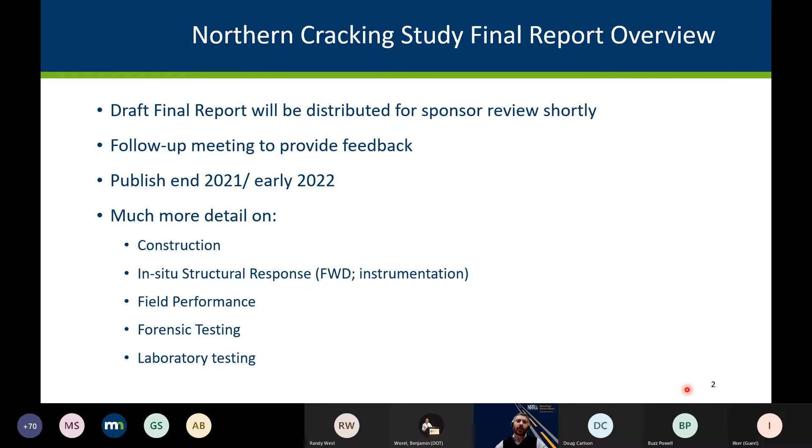One of my challenges in putting together this presentation, especially as Carolina Rodezno and I have been working on this report, is trying to take a large project we've done for 5 years and break it down into a 25-minute presentation. We could probably talk about this project alone for at least a day. So if there's something you're particularly curious about, please see the report for more information on construction, FWD, instrumentation, details on field performance, and laboratory testing.

In the limited time we have today, I'll provide background on why we did this experiment, what sections we were looking at, what happened at MnROAD, and then lab correlations, conclusions, and takeaways. The cracking group experiment was initially started with MnROAD and NCAT, and the overall objective was to correlate the whole suite of laboratory cracking tests to field performance. We did that with test sections at NCAT and MnROAD. The NCAT sections focused on top-down cracking, and the MnROAD sections focused on low-temperature cracking.

The MnROAD sections are a little bit different than the NCAT sections. MnROAD is live interstate traffic on our test sections, so we construct our pavement test sections a full interstate width. We have 2 travel lanes, 12 feet wide, and a full paved shoulder.

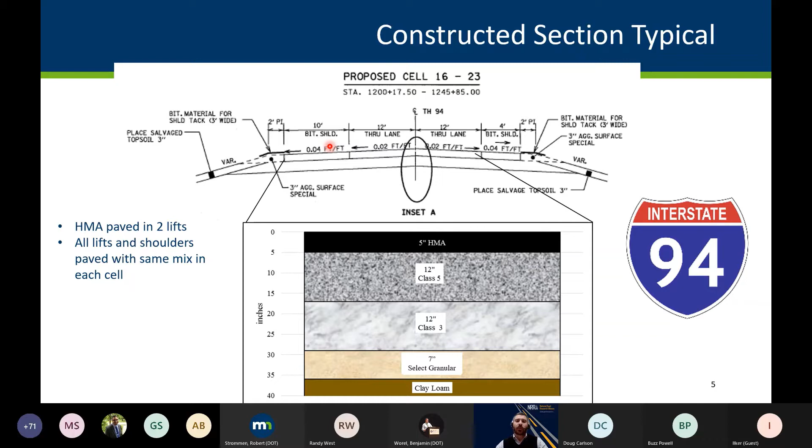In this experiment, we had a common structure of base and subgrade, and we were only changing the 5 inches of asphalt. The 5 inches of asphalt was constructed in 2 lifts, and the shoulders were also built with the same structure as the main line.

Now looking at the mixes that were used, we had 8 sections at MnROAD, cells 16 through 23. These sections, especially the mixes within them, were designed to show a range of low temperature cracking potential. Generally speaking, the lower the cell number, the higher the cracking susceptibility that was intended.

The mixes basically start off cell 21, which would be the typical MnDOT mix used on this, with a PG 58-34 binder. Then from that mix, we have cell 18, which is the -22 binder version. So we selected a binder with a low temperature grade that was 2 grades away, really trying to separate the low temperature performance.

So cells 16 through 19 used a -22 binder, and cells 20 through 23 had a polymer modified binder, or slightly different binder, with a -34 grade.

However, the extracted binder properties that we got from our virgin materials really kind of drew all of our mix properties to the same general area. So instead of getting a 12-degree separation or 2 grade separation, our RAP properties and our virgin binder properties brought us to a pretty narrow range on our low temperature cracking.

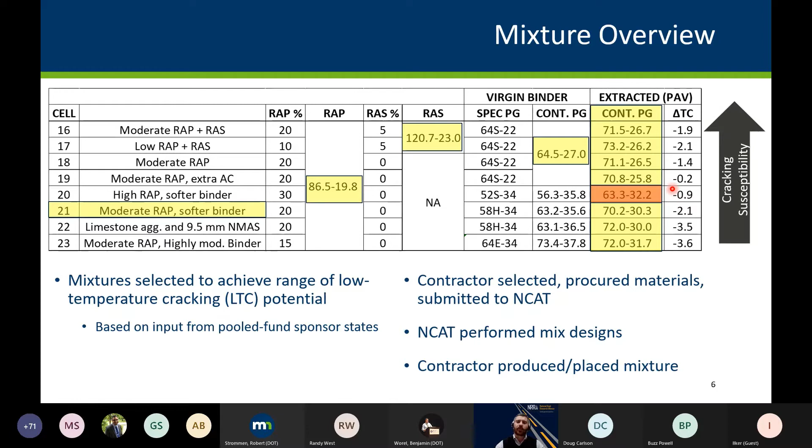Really looking at the extracted binder properties, cell 20 really is the only noticeable difference in extracted PG grade, and it's the high end that you see, that 63 on the warm temperature side.

Now getting into what happened over the last 5 years at MnROAD, one of the key aspects that we monitor, and why the MnROAD facility exists, is the harsh Minnesota winter. Our temperatures ranged anywhere from a cold of -30 air temperature in 2019 to a high of 100 degrees this June.

Looking at the pavement temperatures in Celsius, we were all the way down to -29 degrees in the pavement, and then all the way up to 59 degrees. These MnROAD sections are open to interstate traffic, and we had over 4 million ESALs of traffic applied to the sections during this time.

The ride held pretty steady throughout the experiment. There's a couple things that really jump out at you when you look at this slide. The first is the peaks that we sometimes capture in our early collection. This is attributed to the spring thaw, and if we do capture this peak, it pretty much levels out the next month on our subsequent data collection.

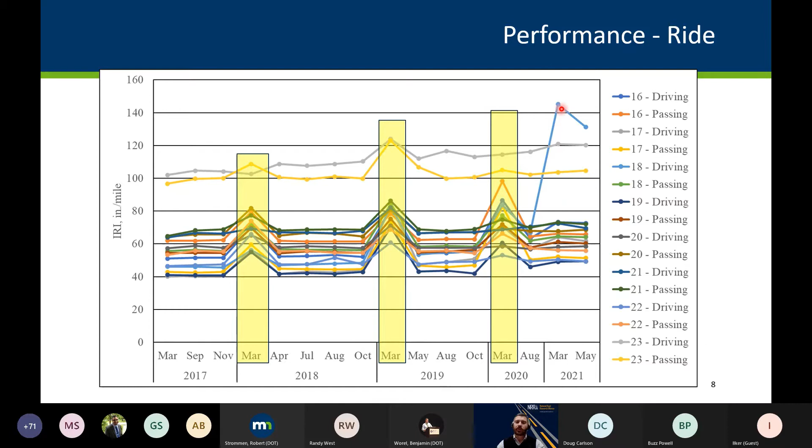We saw that in 3 out of the 4 Marches that we collected. We did not see that this March, but we did see this March cell 18 had a big spike in the roughness value, which I'll talk about more. The other thing that stands out is cell 23 was built rougher and held that roughness throughout the test section, so it was built differently.

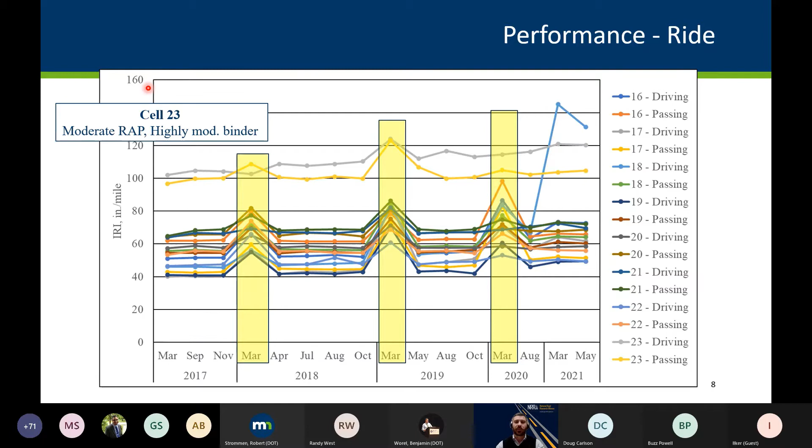Through 2 years, 2 seasons, and then come early 2019, we had a lot more cracking and a lot more distress than we were expecting.

Putting these numbers into context, I know I have a large scale here, but this is total percent cracking in the traveled lanes, both the driving and passing lane combined. For this low temperature cracking experiment, if we had a section with transverse cracks every 50 feet all the way across, we would consider it completely cracked, and that would be 2% of the lane area cracked.

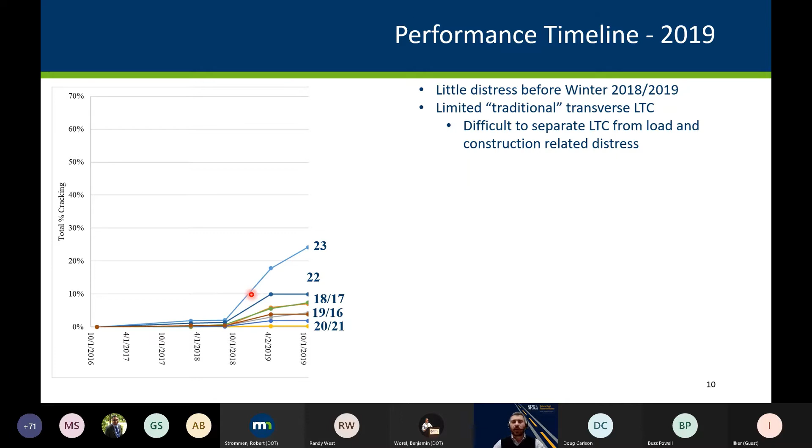When we saw values this high, we knew something was going on, and we were seeing distresses that looked like large fatigue or load related cracking in the wheel path that we were not expecting. We also noticed a lot of deterioration along the longitudinal construction joints. If you look at this one on the far right, you can see the construction joint, and then subsequent cracks developing all the way off of that joint and into the wheel path here.

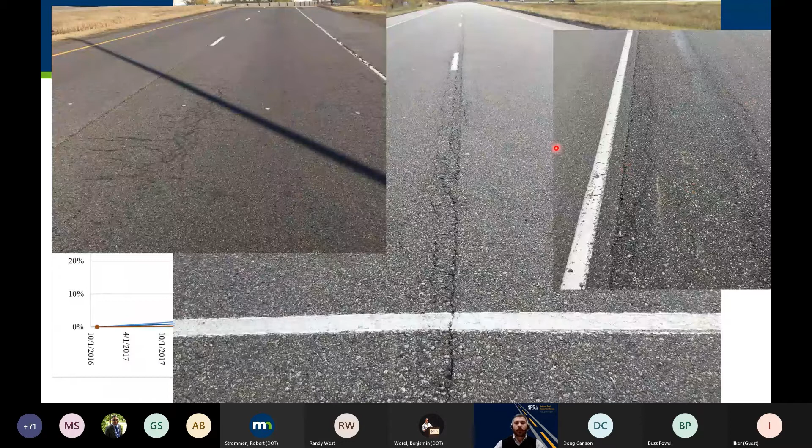So we conducted a forensic investigation. We took cores in distressed areas, non-distressed areas, and over transverse cracks. We basically took cores over every type of distress we saw, trying to capture what was going on.

The majority of the cores that we took, and especially the cores in the fatigued areas, showed delamination. The cores were coming up in 2 pieces, and the cracking was only in the surface - we could not find any distress in the underlying lift.

Then come 2020, through the winter of 2019 and 2020, we saw an increase again, a substantial increase in the amount of cracking we saw.

So we further investigated the delamination that was going on. Really, we were trying to answer the question of whether the sections were built with a poor bond, or whether a poor bond resulted later.

We took cores throughout the sections every 100 feet in non-distressed areas, and we found adequate bond strength in all the cores in all 50 of the samples we took. So bond strength was not an inherent issue in the sections - it was something developing later through other mechanisms, weakening that bond strength.

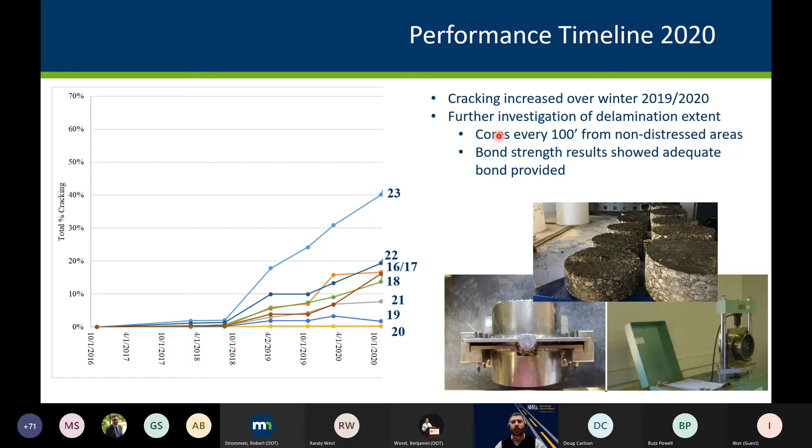Some of the conditions we saw in 2020 - you can see increased distress along this shoulder edge, with some potholing here, and cracks creeping out into the wheel path and into the lane area. There was further deterioration of our longitudinal joints throughout, even after crack sealing was done.

Moving forward to 21, we had an even greater increase in the amount of total cracking we had. That is because in March of this year, we had some more potholes along the edge line. We got an air compressor to clean out the potholes so we could patch them, and we started seeing with the air compressor geysers 10 feet away. The pavement was completely delaminated, as you can see with the shovel here in this video.

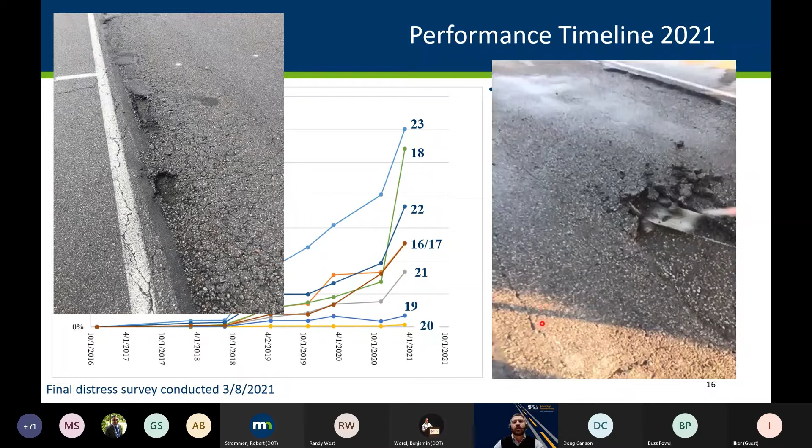We're fortunate enough at MnROAD to have a partnership with Caterpillar, and Caterpillar was able to mill these sections and pave these sections for us through a partnership. Really beneficial to us and Caterpillar - they want to put hours on their equipment, and we have lots of construction work that needs to be done.

One of the really interesting things for us as we milled these sections - there was no observable distress in the underlying layer. You can see in this image the types of potholes that were throughout, and after we milled, we did not see any distress. There were a couple of transverse cracks in the lower lying structure, so I can't say there was no cracking in the bottom 3 inches, but it was only the transverse cracks that were full depth through there.

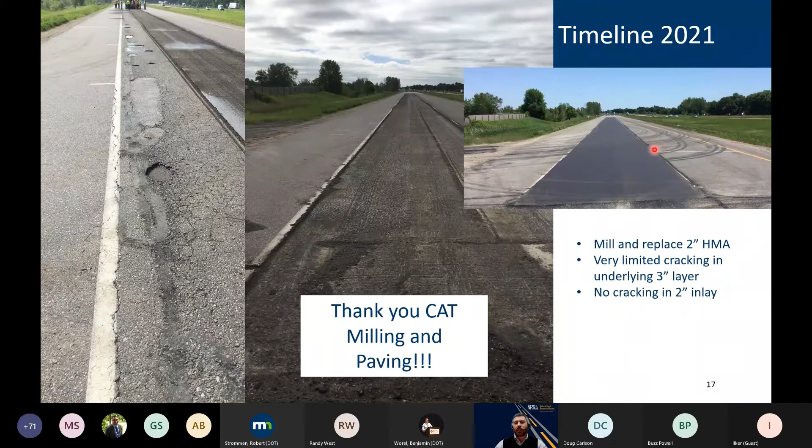Caterpillar milled and paved for us, and since paving in May, we have not seen any distress in these sections.

Drawing conclusions from the field performance, we can see that a wide range of performance was observed. It's important to see that the rutting and ride values were still very good until the potholes or severe distress occurred. That tells us we had a sufficient structure there in the first place, and really it was just the top 2 inches of the mix that wore out, not the overall structure.

The majority of the observed cracking is believed to be a result of water intrusion into the longitudinal construction joint, and then a weakening of the bond between HMA layers.

If you remember from previous presentations throughout this experiment, cell 23 was excluded from the lab field correlations. It was built with a higher roughness. There was a bump prior to the section that had a weak base and subgrade, and there were moisture issues there. We did a TRB paper and have presented on this several times, with more detail into why that decision was made in the report. But overall, care must be taken when using the MnROAD Cracking Group field performance data to correlate to laboratory tests.

In March 2020, Randy West and Nathan Moore came from NCAT to help with our forensic investigation and get some extra eyes on these sections. When Randy was here, he observed that the shoulders had transverse cracks in them, and they were not influenced by some of the other issues we were seeing with the trafficked or mainline portions of the test sections.

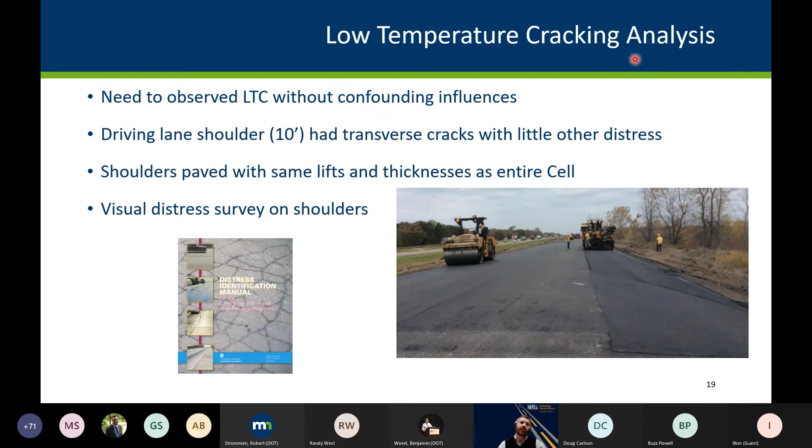So we started collecting distress surveys on the shoulders and using the shoulders as a correlation to our laboratory tests. If you remember from one of my beginning slides, the shoulders were built with the same mix and same thickness as the traveled lanes in these sections.

Another reassuring aspect is when we looked at the shoulders, we were matching the same trends we were seeing in the mainline and the same expected trends with these mixes. So the mainline section, cell 20, did not have any cracking, and the shoulders also did not have any cracking. Then you can see the expected differences as we use that minus 22 or change binder grades with cells 16 through 19.

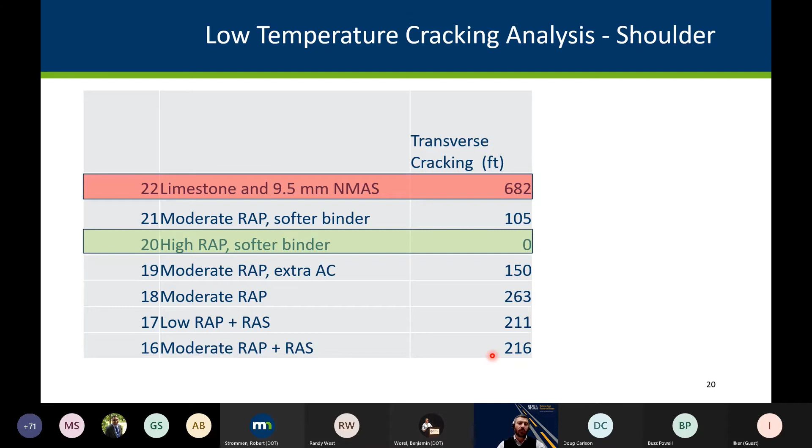Cell 22 had a large amount of transverse cracking in the shoulder, and these are 10-foot shoulders, 500 feet long. So if you're thinking that 682 feet of cracking is a lot, it is. This is what we were observing in the shoulder - we have transverse cracks repeatedly, one after another.

So using the shoulder data to correlate to the wide suite of laboratory tests - this is normally the portion of the presentation I would turn over to someone at NCAT, and they would discuss in more detail each of the tests and correlations. Unfortunately we don't have that much time today, so I'm just going to provide a summary of the correlations we saw and then highlight a couple of the tests and what we were looking at in our analysis.

So the best correlations, as you can see here in red, were the DCT fracture energy. We did all the correlations on reheated plant mix, and then also plant mix that was reheated and critically aged. The best correlations were the DCT and also the NCAT overlay tester, especially the beta parameter.

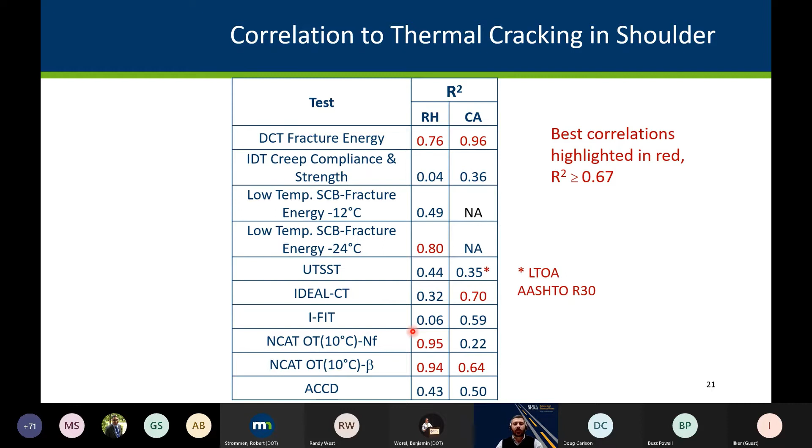Looking closer at some of our DCT results, here at MnDOT we were pretty happy to see that the threshold we commonly use for reheated mix of DCT of 400 joules per square meter held with these sections, with the only section that had the worst performance being cell 22, which is the only section that fell below that line.

Another important thing, which we saw only with the critically aged, was that cell 20 was predicted as the best performer or had the highest DCT fracture energy. Cell 20 subsequently was the best performer in the field with the lowest, or no, cracking.

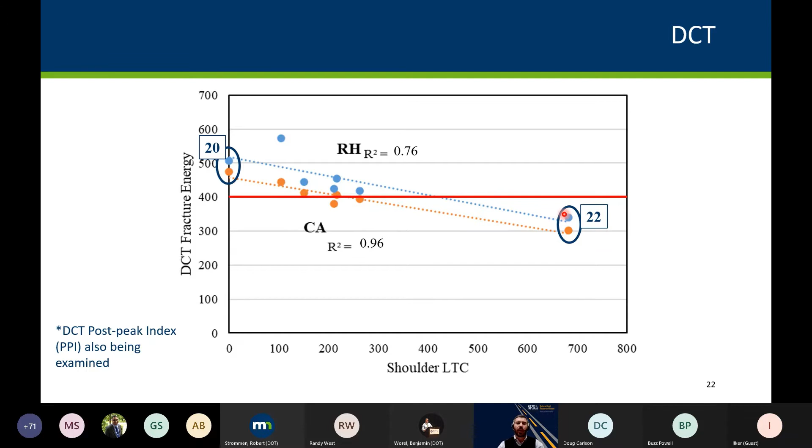We found similar trends in results with the NCAT beta parameter. Cell 22 was identified as the worst performer, and cell 20 was also identified as the best performer, with strong correlations both on the reheated and critically aged mixes. So we looked at all of the tests in a similar manner.

Were they able to identify the best performer and the worst performer? We had good results with the semicircular bend test on the reheated mix, able to identify the best and worst performer, but not so on the critically aged.

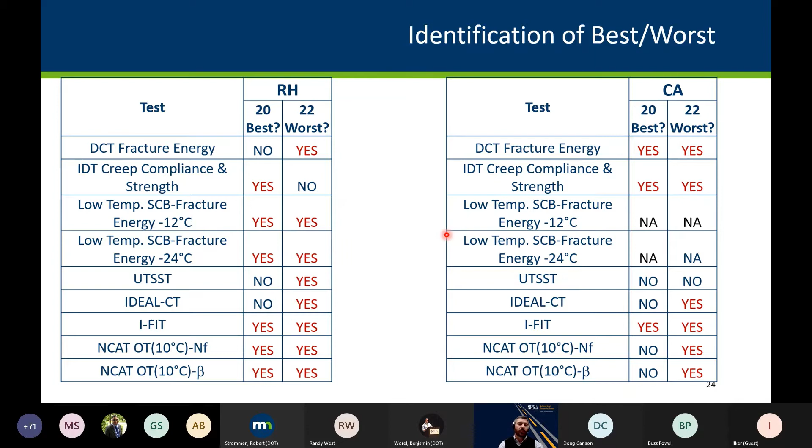So wrapping it all up and concluding the experiment, we saw a wide range of field performance. The rutting and ride were very good until literally pieces fell out of the road.

The cracking observed was caused by multiple mechanisms: construction-related, load-related, delamination, environmental. And the cracking we saw, especially the low temperature cracking, was influenced by the narrow range on our extracted PG grades, and then the structural delamination that we observed.

However, we were able to draw a lot of conclusions out of the low temperature cracking on the shoulder. The DCT had the best correlation with the field. The threshold that we used for the DCT accurately identified the worst performer, which was reassuring for us at MnDOT.

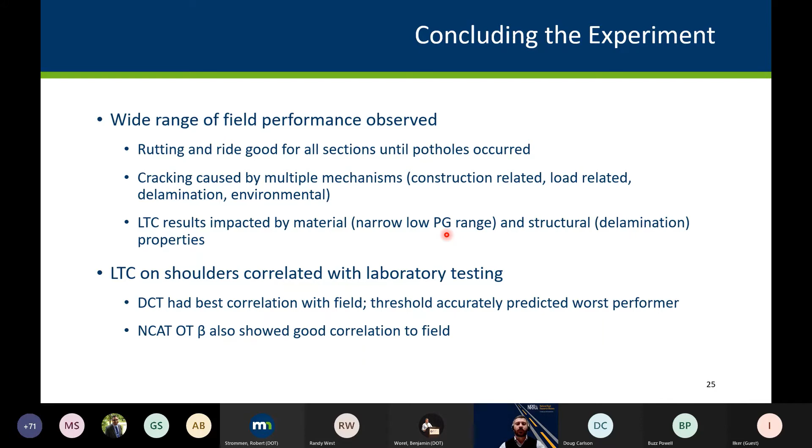We've spent a lot of effort with the DCT, and we're continuing to find ways to use the benefits of the DCT, but incorporate them into a more field-friendly or faster type test that gives us the accuracy of the DCT, but on a faster turnaround. And then the NCAT overlay beta parameter also showed very good correlation to the field.

So some of the quick takeaways: really want to be careful not to throw the baby out with the bathwater with the field performance that we have here, because even in the main line or traffic lanes where we saw an array of distress or mechanisms causing the distress, the general trends that we expect with some of these mixes and the one-to-one mix comparisons still held true.

So we saw better performance in cell 21, which is our PG minus 34 binder, than we did in the unmodified minus 22. Even in the unmodified minus 22 binder, we saw better performance when we added more binder, the comparison between cells 18 and 19.

Similar results in the report, or similar comparisons, are made on kind of a mix by mix basis for the laboratory tests in the report.

Carrying these efforts forward into MnRoad 2022 construction and the MnRoad Reflective Cracking Challenge, which I'll be talking about later this morning with Randy West.

We're really going to pay special attention to ensure consistent base throughout. We're planning on having increased moisture sensors in our base and subgrade, and especially identifying cell 23 and remedying that early on in the construction.

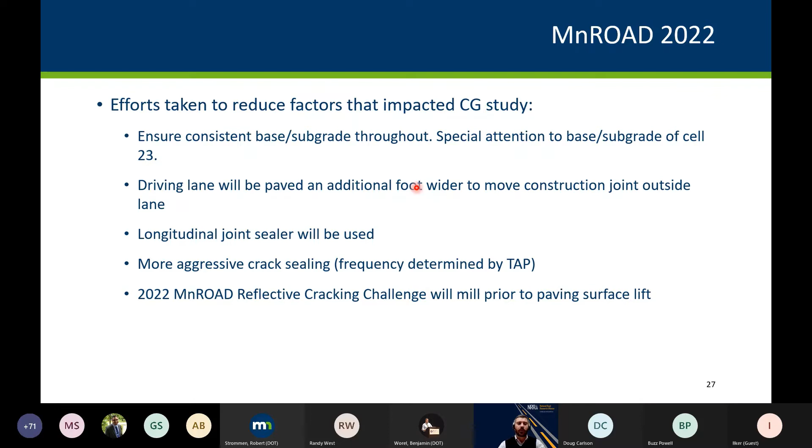And then one of the things that we're pretty certain we're able to incorporate into the contract is we're actually going to pave our sections an inch thicker, the underlying layers, and then mill with our partnership with Caterpillar. We'll mill an inch and then apply our final lift. That way we are applying our overlays to a milled surface, one being more representative of how we apply overlays in the field, but also really trying to eliminate any potential for delamination.

With that, I'd like to acknowledge just the MnRoad research team that makes everything possible for us, and then also Dr. Carolina Rodezno at NCAT, who have been working closely with us on this project, especially on the laboratory side of things.

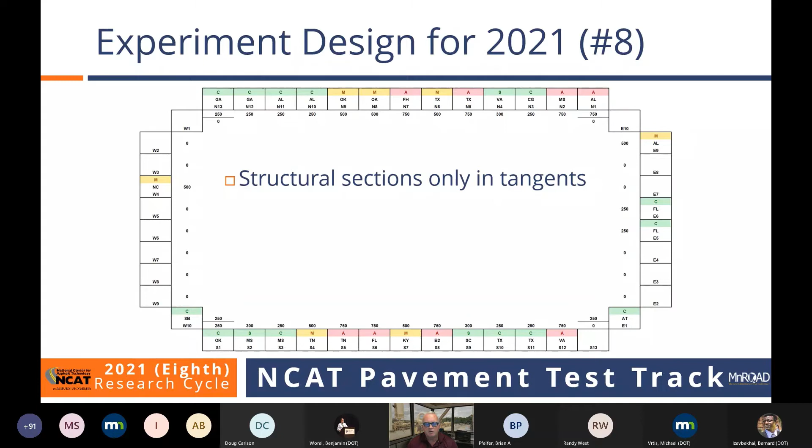The location of sections must meet research needs. For example, if you're looking at reflective cracking in a mill and inlay, there's got to be cracking underneath that makes that possible, so we can't put sections just anywhere. We've been very blessed to find good matches for most everything everybody wanted to do. We do have to plan around traffic continuation, so sometimes it'd be really nice to put all those red sections together, but it's just not possible. We put as many of them together as we can and try to make placement as logical as possible. Sometimes even states prefer not to relocate, and that complicates things a little bit. But of course, we really want to accommodate everybody's research needs in the best possible way.

To give you a feel for what this track looked like, we ended up with 32 sponsored test sections, and for Randy's benefit, for the NCAT team's benefit, I believe when we did our budget brainstorming we planned on 31, so we were really in the ballpark with that. We were very, very close.

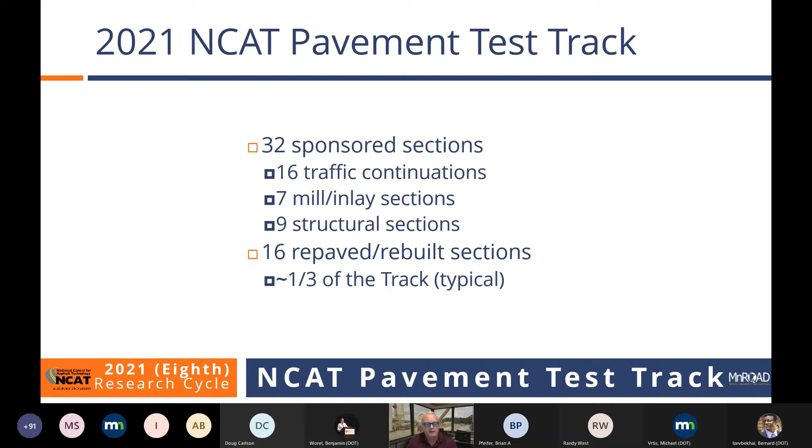16 of those are traffic continuations, 7 are mill and inlay sections, and 9 are structural test sections that were deep rebuilds. So we repaved or rebuilt 16 test sections, about a third of the track. Typically, in these rebuilds we do every 3 years, we end up rebuilding about a third of the track. So when you hear us talk about rebuilding the track, if you're not familiar with the research, you might get an image of us rebuilding everything, and we don't do that. When we built the first track, we built 46 unique test sections, and pretty much every 3 years after that, we rebuild about a third of what we have in place.

I'm not going to spend a lot of time on traffic continuations because I'm supposed to be talking about construction, but since that is part of the sponsor scenario, I wanted to show you what we're continuing. There are 16 sections: we've got high RAP with recycling agents, a foamed CCPR base, some high performance thinlays at half inch and three-quarter inch thick, interlayer strategies for crack prevention, and a soybean based polymer modified asphalt.

And as I go through my slides, when you see a line in green, that's an easy visual indicator that it's a privately funded test section.

For those of you not familiar with what we do, the private sector pays the exact same cost as agencies pay. So this is very, very expensive research, and it represents a significant investment on their part.

In that picture at the bottom of that slide, those are the interlayer test sections that we have in place in N12 and N13 for Georgia.

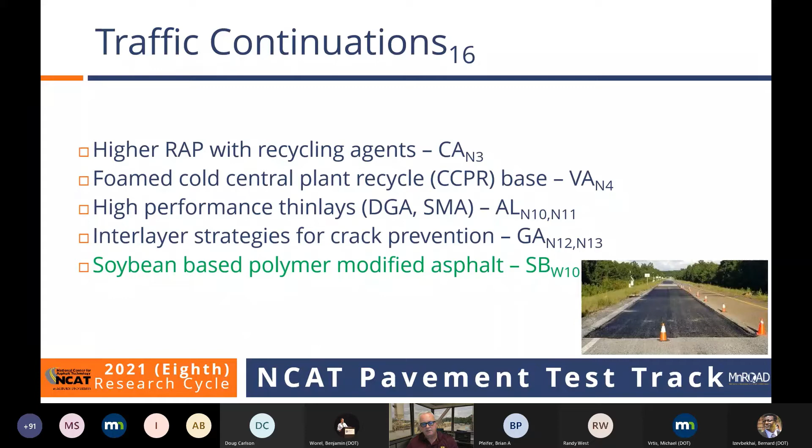If you're not familiar with what we do, I sometimes take for granted that everybody knows this, but when you see a test section designation, for example N3, that means test section number 3 on the north tangent. So you've got north, south, east, and west, and then sequential numbers that range between 1 and 13.

More traffic continuations. We've got balanced mix design with recycling agents and gradation changes. We've got the structural benefit of base stabilization and subgrade modification, long-term benefit of surface rejuvenators, full depth rapid rebuilds, rejuvenation of an open graded friction course surface, and then the impact of density on performance.

That rejuvenation is the surface application of a new rejuvenator that's a privately funded test section. So something is done to that section, but it's funded as a traffic continuation because the cost of application is borne by the company sponsoring that section. You'll get more details as time goes on for these test sections.

So this hopefully gives you a feel for what our stockpile yard looks like when we're building the track.

We long haul materials from all over the country, from as far west as Oklahoma and Texas, and as far east as Virginia, and you end up with a lot of relatively small stockpiles scattered all over the place. I wanted to share this picture because Vicki Adams is in it, in the NCAT truck there, and Vicki works herself to death receiving all these loads, making sure we don't contaminate piles by unloading a truck in the wrong location.

She does gradation measurements for us and moisture contents every day before we run, and then again after the rain. I also like this slide because we have this system where she puts pile lines out there.

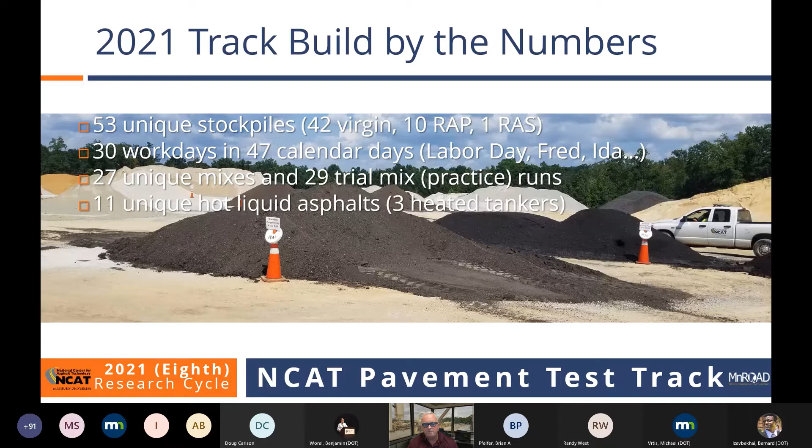So you can imagine the puzzle of the track. I'm sharing this with you so hopefully you can get a feel for the effort that Jason Nelson, the test track manager, and I put into making sure that everything fits together and we have uncontaminated material in the tanks, have completely empty tanks or heated tankers to run off of.

We built the track this summer with 3 asphalt plants: 1 Astec double barrel plant, the plant over at East Alabama Paving, and then Wirtgen brought in a KMA plant for cold recycle mix, and Pugmill Systems brought in one of their pug mills also for cold recycle mix, which I'll say more about in a minute.

We used 10 hot plant additives. 7 of those were solid additives that we ran through our Hi-Tech Asphalt Solutions feeder system. And then 3 were liquid additives that we added through a multi-port injection system we have in the AC supply line, with a calibrated Ingevity pump that Ingevity provided not just for their material, but also for some other materials that we ran.

We had 4 unique cold recycle products. 2 of those we ran in the KMA plant, and 2 of them in the pug mill. Again, my focus is the construction effort. You're going to learn more about all these things as time goes by. We'll break all this down with the sponsor meeting that we'll be planning for this coming spring.

And we used 3 different tack products. 2 of those were hot applied, and 1 of those was an emulsion in support of the specific research being done on those test sections.

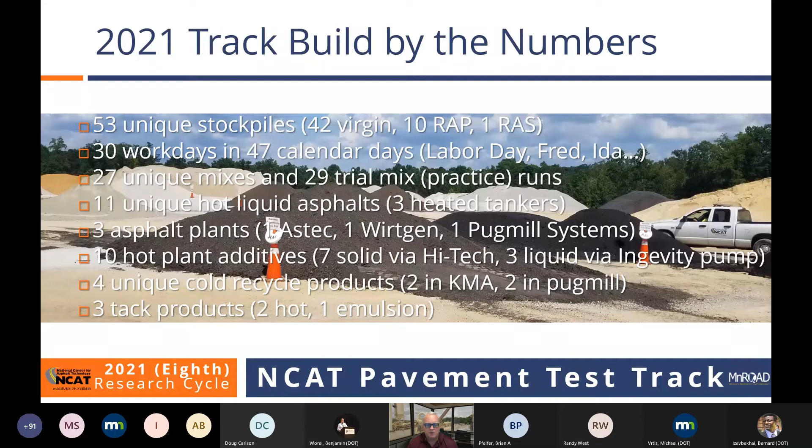So the new mill and inlay test sections, we had 7 of those. 3 of them are balanced mix design with recycling agents and gradation change, that kind of thing. We have a BMD section. One of the more interesting sections is for Tennessee in S4, and it's a Superpave gyratory compactor design where we're looking at using Marshall equipment for quality control testing of balanced mix design.

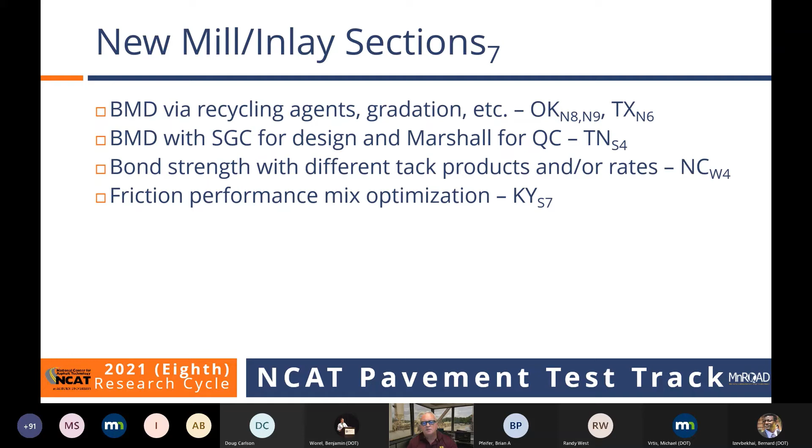Bond strength with different tack products and/or rates. Friction performance mix optimization—this is for Kentucky, where we're supporting Kentucky's implementation of balanced mix design, but also with a laboratory friction requirement. Nathan Moore is our lead on that research here at NCAT in the laboratory.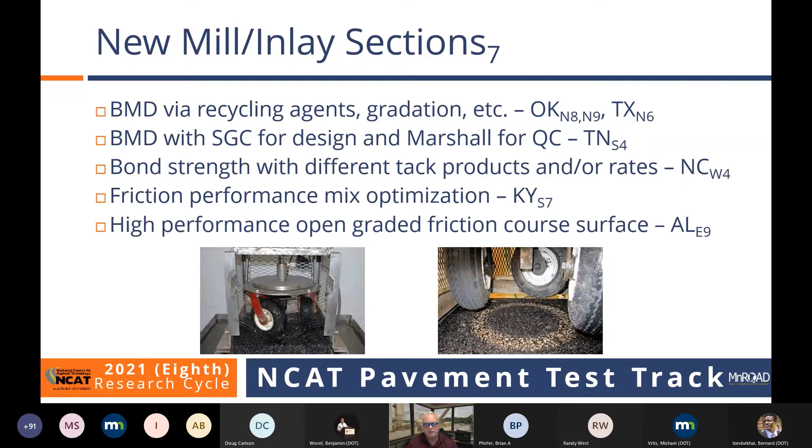And then high performance open graded friction course surface for Alabama in section E9. And then we use some materials that can sometimes be challenging in Alabama, but our objective was to not make the experiment easy with really easy materials or really high quality materials. We wanted to use common materials and develop a high performance system for those materials for Alabama.

We had 9 new structural sections that we built this summer, and these are where we completely remove the test section and then build from the subgrade up with new subgrade materials, new base materials, and then new surface. All these are fully instrumented for high speed response by Dave Timm and his team with strain gauges and pressure plates. So for Virginia, one of the more interesting sections on the track is what's the minimum HMA thickness that we need over recycled cold recycle mix.

That's in section S12. In the additive group, the objective of the additive group that Randy is going to provide more details on is to really quantify the impact of the additive on pavement life. I've got AG in green there because in a public-private partnership kind of way, the vendors paid for phase 1 laboratory studies. The state DOTs and FHWA in partnership, who are paying for the overall experiment, reviewed all the laboratory findings with BMD testing and modeling, and they picked what was going to be actually built on the track this summer.

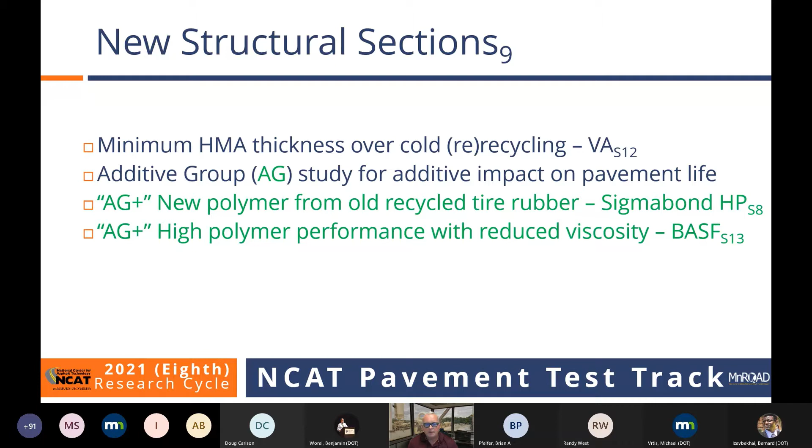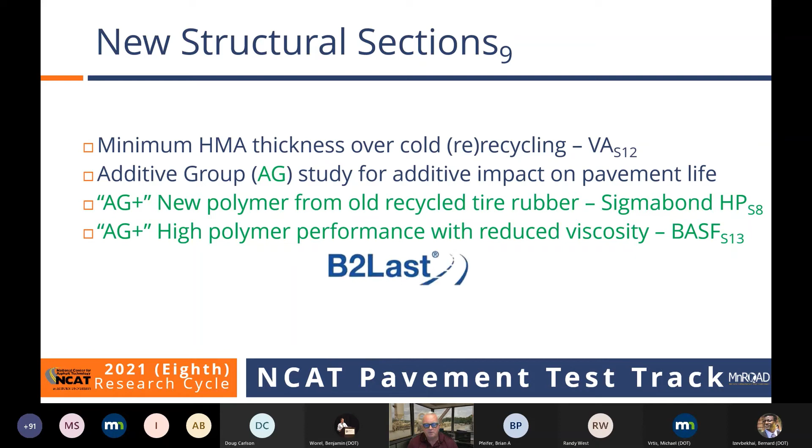We did have a couple of privately funded AG Plus test sections that are identical builds with other materials - one is a product called Sigmabond, and the other is a BASF product called B2 Last, both high polymer performance type products. The objective of the study is to quantify the benefit of those products on pavement life. The vendors paid for the phase 1 laboratory testing, and then these agencies, in cooperation and partnership with each other, went through the selection process and picked what would be put on the track through a blind ballot process managed by NCAT.

This is the construction schedule that I would routinely send out to stakeholders as we worked through construction this summer, and I wanted to take a few minutes to go over this. Thankfully, one of the benefits of web meetings is you can see a little bit more with a smaller font. So this is the exact schedule that I sent out to everybody.

This is what we defined as a sublot in our contract process that we built this summer. I wanted to say a few things about it related to construction to give you a feel for how everything went, starting with instrumentation. Dr. David Timm is our PI, or at least a co-PI, on all the instrumented test sections. So when you see an H in that column, that means we had to have calibrated gauges installed prior to the placement of the surface. We would complete a subgrade, install pressure plates, complete a base, install pressure plates and strain gauges, and then we could pave.

The supply chain hit us really hard with instrumentation supply this summer. Dave Timm's team, Dave and Matt Sasser, and then his students did a great job of staying ahead of paving. We were really concerned that we were not going to be able to get gauges that we ordered way in advance, and it was going to cause a hard stop in our paving and create all kinds of problems. But praise God, Dave was able to get his hands on gauges, with some cooperation from off-track research he was doing, and was able to stay ahead of us - that was something that really scared us.

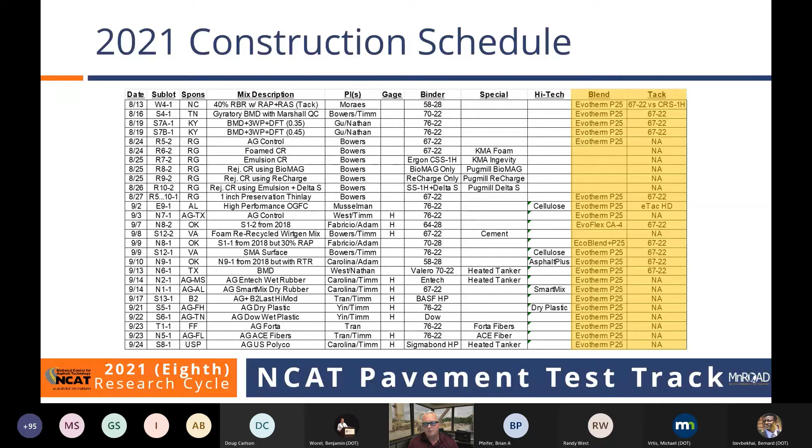And then the liquid additives that we pumped in, you see in that next to last column, and finally the different tacks that we used. You see a lot of NAs in there because those are all structural test sections where a tack product was not used.

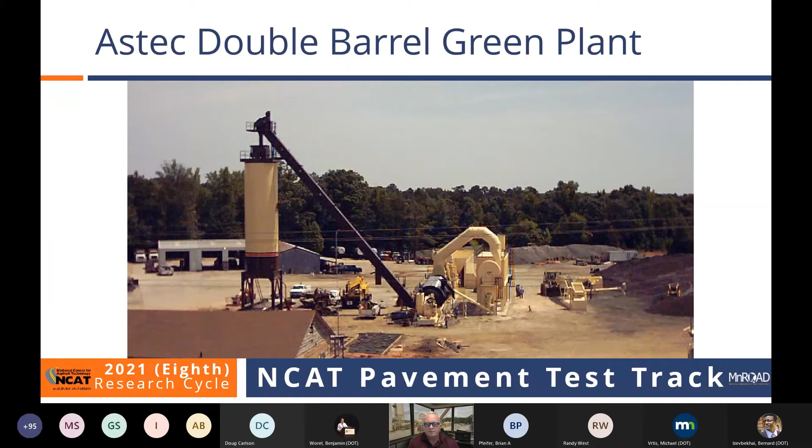This is a shot of our Astec double barrel plant being erected back in 2003, the first year that East Alabama Paving built the track with us. They actually bought this plant - we were the first project that they ran with it back in 2003.

You probably see this as my virtual background a lot in many of the presentations that I do. This is the view from the control room, and since this plant was put up, 2 additional cold feed bins have been added, a second mix silo has been added, a load cell controlled shingle bin has been added, a green foam system has been added, and then several different things were added to it from a plant automation project that Randy was a PI on back many years ago that still benefit us when we run mixes on the track.

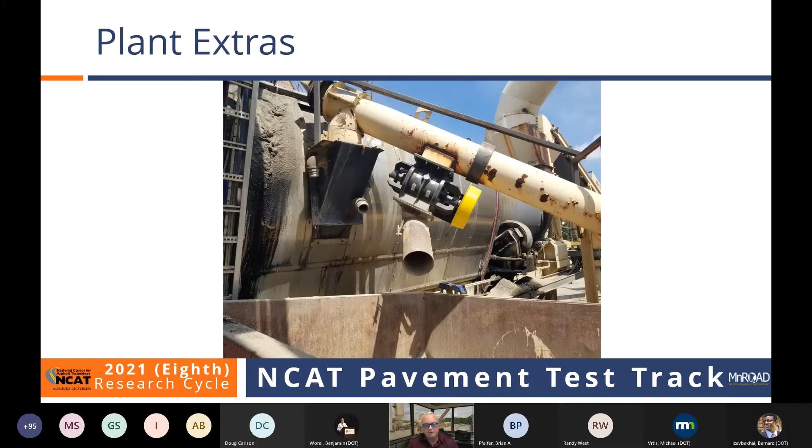One of the things we added in this cycle was the ability to really remove the -200 in the mix in a highly controlled way. This system is really simple, and on the baghouse return there's a digital controller for this. When you set it on 5, you're removing 1% -200. When you set it on 10, you're removing about 2% -200. It was a blessing and really helped us meet the volumetric requirements on some of the volumetric mixes we ran this summer, and it's going to be a great tool for us in the future.

Again, because it is a computer controlled plant, when Jason and I are there running the plant with our contractor, we can stand there and look over the operator's shoulder and see plots like this to know that everything is under control.

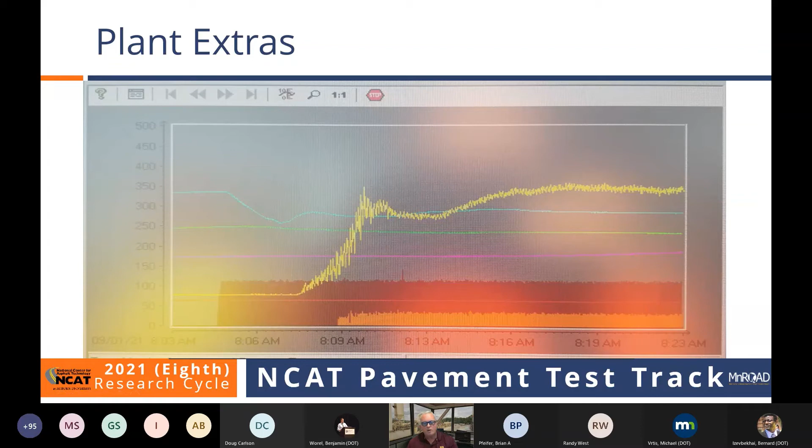This is mix temperature, so we know when we're in a steady state with mixed production - this would be our waste phase of mixed production. This line is the baghouse temperature line, so when that line fluctuates, that means the loader operator put something wet in a bin, and we need to be really careful because that can cause the asphalt content to fluctuate. And then this is the virgin weighbridge and the recycle weighbridge. So we have really good visual indicators of where we are in steady state mixed production that help us do these short runs in a really precise way.

In the AC storage tanks, the tank on the left in this graphic is the neat asphalt tank, and tank number 1 is a polymer tank. We can look at the depth indicators on that - you have about 2.5 tons in those tanks per foot. So every day, or in between every run, we're checking those depths to make sure we've got our AC supply coming, or make sure we're close to empty, so we can suck tank number 1 completely dry before we put a different binder grade in there, so we don't have any kind of confounding effect from that.

As I said, Hi-Tech Asphalt Solutions provided us with a feed system. They donated the system, and also some of the raw materials that we needed, like the cellulose used for the OGFC section that we built. And here you see us loading some recycled tire rubber product into the feed side of this bin.

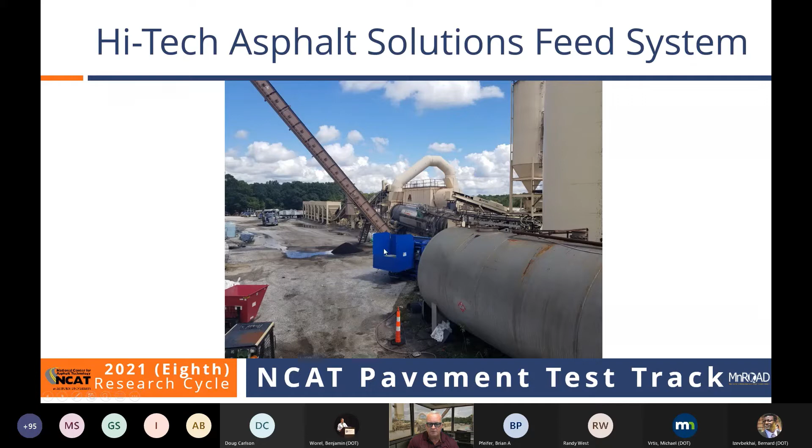When you run something like plastic pellets, it's going to be a higher feed rate, and that means there's going to be some dumping that has to occur in the middle of the run, so you need to use the load side of that system. If you notice in this picture, we've got the gate up on the load side because we had to load it up with plastic pellets so it could auto-feed while we were producing mix.

I wanted to give you a feel for some of the dry additive stuff we used this summer. The two on the left are rubbers, and the one on the right is the dry plastic we built in the additive group section that Randy's going to talk more about. The rubber product on top is Smart Mix, added at 12% by total binder weight.

The dry plastic is added based on aggregate weight, and if you calculate it based on total binder content, it was about 8.5%. The rubber product on the bottom is Asphalt Plus, also added at 12% based on my notes.

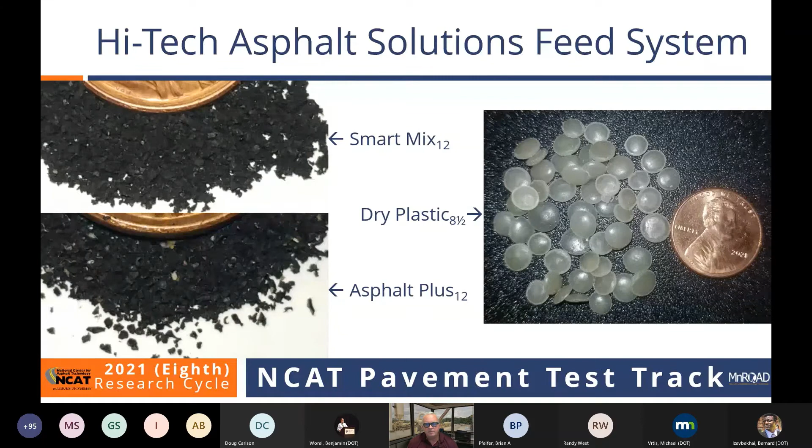I like these close-up images because you can see there's a bit of difference in those products, since they're proprietary technologies, but they both fed through that high-tech plant feed system without any kind of issues.

Here's a picture of the KMA 240 that we used for the Virginia recycle study, as well as recycle sections on the off-ramp where Ben Bowers is the PI. This is the portable pug mill from Pug Mill Systems that we used to build some of our off-ramp test sections, and this is research that was not funded by the agencies.

These are all privately funded test sections, but on the off-ramp for this cycle, we went all the way down to base and put in 4 inches of different types of recycle mix - some foam, some emulsion, some rejuvenated, some with just rejuvenator, and some with emulsion plus rejuvenator. So there's 6 test sections out there, one of which is a hot mix control.

In addition to the 4-inch bottom, we've got a 1-inch preservation thin lay surface on top of those sections that relates to the thin lay surface over on Lee Road 159, which has been in service since 2012. So it'll be really interesting to see how these sections do on the off-ramp.

Ultimately, traffic on the off-ramp is about 3.25% of the traffic we see in the test sections, based on how frequently we come off the track and actually have our trucks on the off-ramp.

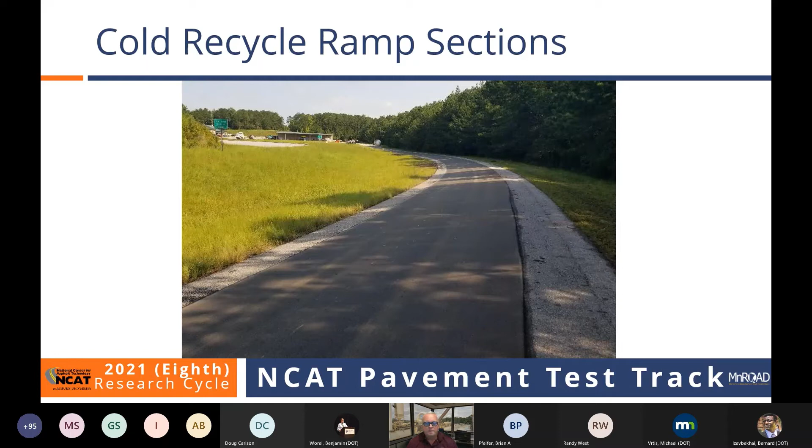So we'll be reporting on this in the future for the ramp, but if performance is good in these sections, and if cold recycling continues to grow, then we may have test sections on the track in the next cycle that we'll build in 2024.

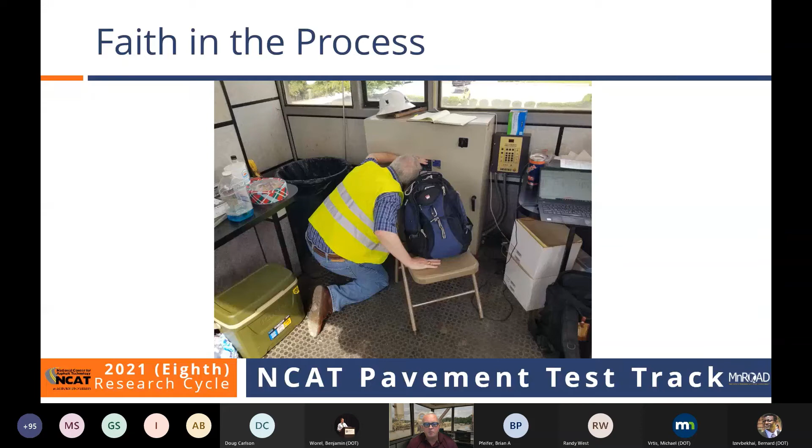We've been doing this a long time, and we have our processes in place that you just got to have faith in. This is a picture of Jim Musselman on the faith front, saying a prayer for good performance of ALDOT's OGFC test section that we were in.

Matt Sasser's saying a little prayer here that all the gauges he's helping Dave Timm install in the structural test section survive. And then you've got Rex Stroud, our paving foreman, saying a little prayer that the paver doesn't strike any of the gauges, as he navigates that paver through them.

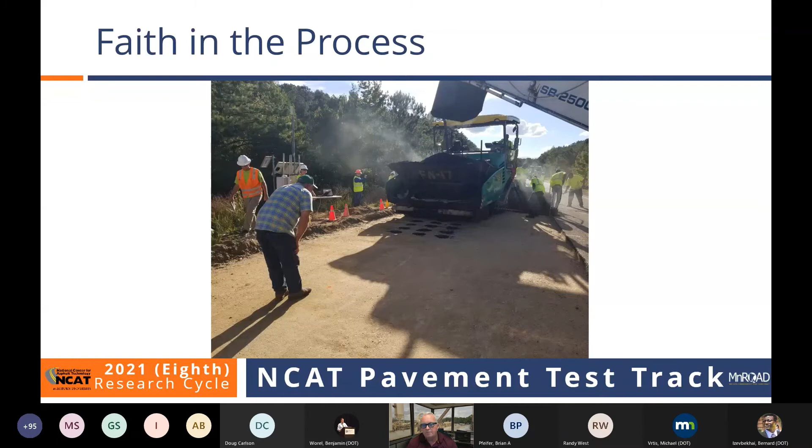Many of the test sections we built this summer were thick paving test sections - in this case about 5 and 3/4 inches thick for the additive group and additive group plus test sections. We've done thick lift paving as thick as 8+ inches in the past.

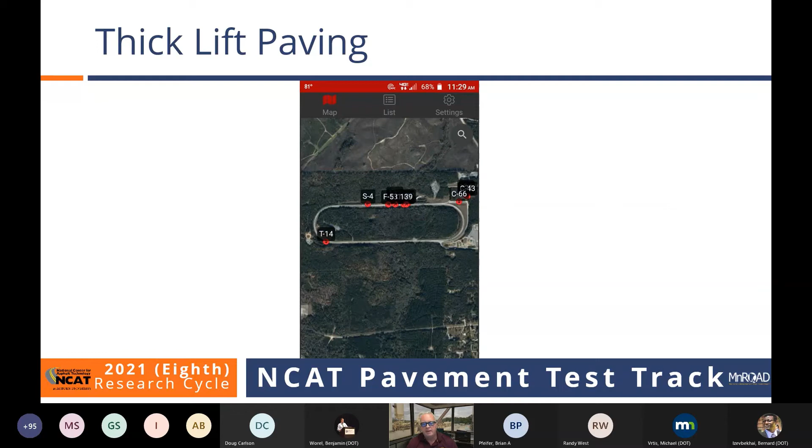When you're paving thick like this, logistics are key. You've got to have trucks stacked up to support paving, because you don't want to stop the paver. One thing that's helpful to us is East Alabama Paving has transponders in all their trucks, so they know where all their trucks are, and we can run mix at the plant and make sure they're stacked up properly to support this paving.

Just the weight of the screed when you're paving thick like this, you still have waves that are going to create localized roughness. Our goal with these is to come back and do diamond grinding and get them at around 100 inches per mile.

Some of the thick paving we've done in the past has been as high as 350 inches per mile. So it can be rough, and it takes a lot of practice and logistical support to get it smooth. We've now done our diamond grinding and seen some big improvements in roughness, but I think we're going to have to do a little more work to get it really where we want it.

Of course, that's construction, and when these mixes are placed on the track, there's a massive amount of bulk sampling done. What we do is, when material has been run through the shuttle buggy, we boom it over to a flatbed truck and haul it around behind the track lab to make a little sample stockpile back there.

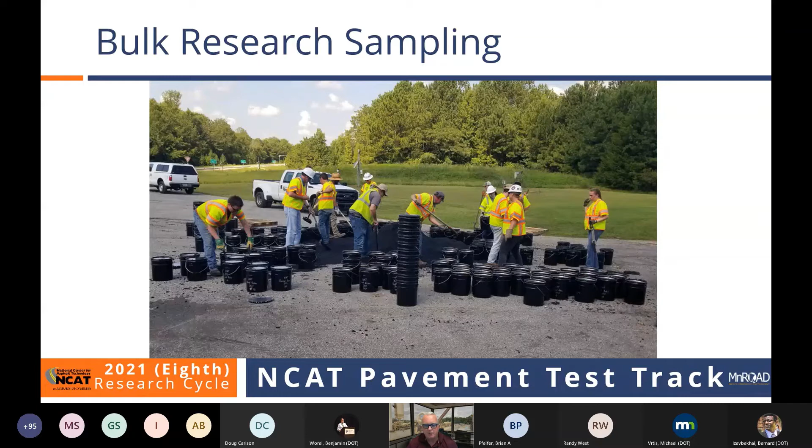This is one of my favorite pictures because Jason Moore worked really hard this summer to help us out at the track. You see Nathan there and Jason there and everybody on the track team, but there are also some vendor personnel helping us. When you've got to do this kind of sampling, everybody jumps in and tries to contribute, and we're very grateful for that.

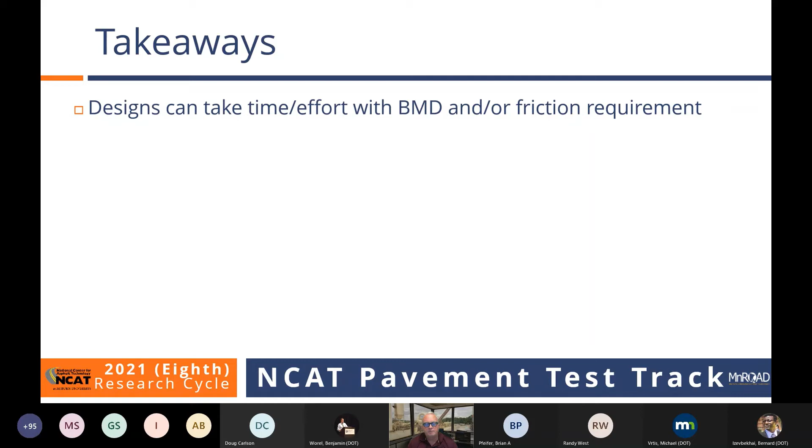So some takeaways from the build this summer: the designs on the lab side can take time and effort with balanced mix design and the friction requirement. Nathan Moore and Adam Taylor worked really hard at NCAT to stay ahead of us this summer, and especially with the additional friction requirement, that took a lot of work, and we appreciate the investment they made.

This is really important, I think, because y'all have heard me say this before. I kind of instinctively wear an agency hat and then change over and wear an industry hat, because I used to work as a regulator, and then I'm kind of living like a contractor when we rebuild the track.

Additive utilization is nothing to fear by either industry or agencies. I'd be confident writing a spec and enforcing a spec if I was with an agency, and I'd be confident bidding a job and building a job and making money if I was in industry. I'm pretty excited about the potential of additives and what they can do on both sides of the fence.

Another observation from this summer is, in my opinion, and from Jason Nelson's perspective, BMD compliance is, quote, easier than volumetrics. When I get a volumetric design from a state DOT that we have to put on the track, there are so many things you really want to hit to meet. BMD compliance really is easier because it's about gradation and asphalt content when we're putting them on the track, which is much more straightforward.

We have meaningful quality indicators for agencies, some good options in the laboratory. And then if I'm thinking like a contractor, I've got practical production targets for balanced mix design that are frankly easier to meet and more straightforward than volumetrics.

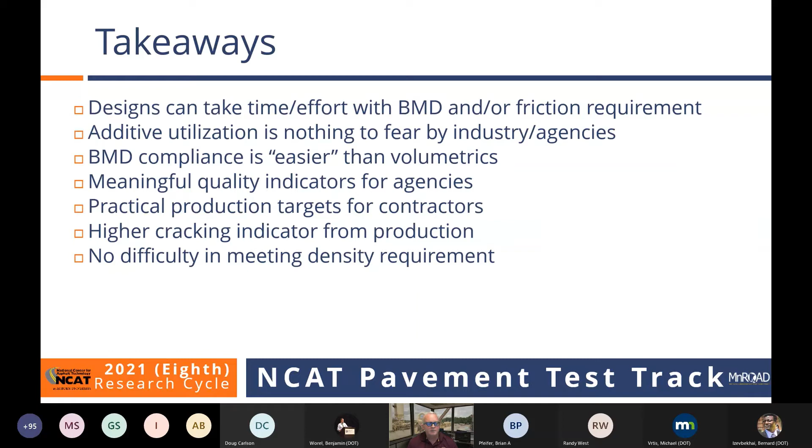And I think that's going to be an important thing for us to document in this effort. We didn't have any difficulty meeting density requirements with this track build. It was very straightforward. I think there was one section that we had to do some additional rolling on. Part of the reason is balanced mix design, and part is because Hamm provided us with some really efficient rollers to use for the track build this summer. There's our front roller, back roller, and intermediate roller staged out there as we're getting ready to pave out ahead of them.

Another takeaway from this summer is you need more bins in mix designs when you have challenging stockpiles. From my perspective of track construction, challenging stockpiles can have typical quarry gradation variability. It's not a big deal to the quarry, but it can be a big deal to you as a contractor. So I'm an advocate of putting more mixes in your design, more stockpiles in your design, running more bins, because that gives you more opportunity to fix things when gradations come in a little different, or stockpiles have some segregation characteristics.

Regardless, unique bin calibrations are essential with short production runs. So we calibrate every stockpile that comes in. We don't just put 78s in a 78 bin. We calibrate specifically for those materials, and that's really how you get a good match between target tons per hour and actual tons per hour at the plant.

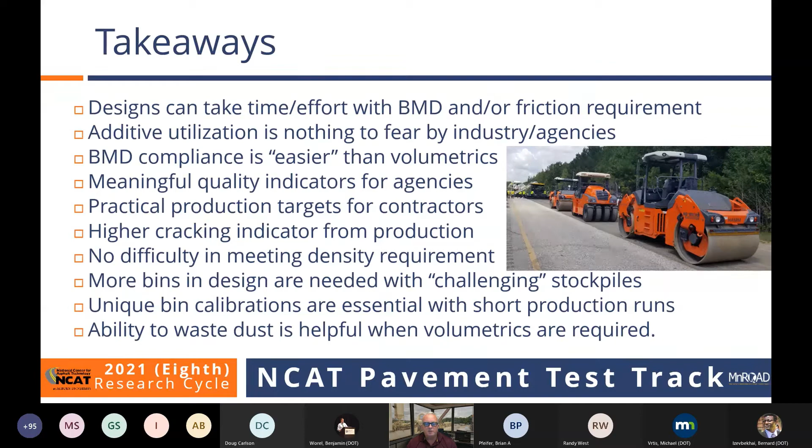And when I've got a volumetric requirement, I love the ability to really control the waste dust. That depends on your aggregates and the market that you're working in, but that's something that'll be really useful to us in the future.

We're in the process now of doing some wrap up work and baseline testing. We got to do some painting and marking, that kind of thing. But as soon as we're done with all that, we're very close to running the fleet, so I'm sure we'll have updates for you. Jason Nelson will talk about that when we meet in the spring.

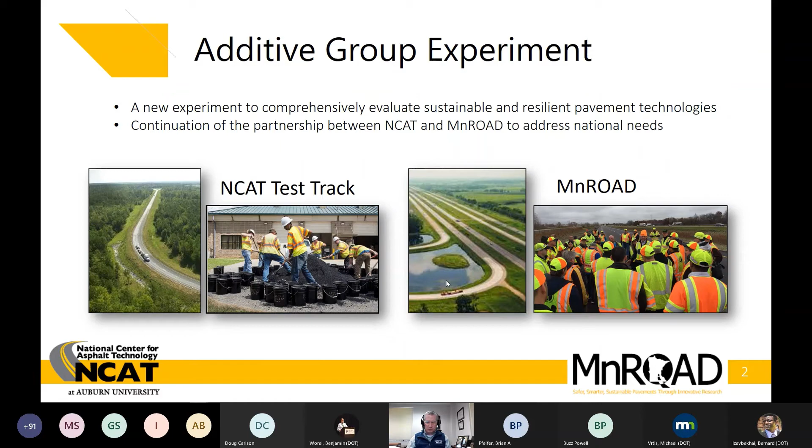In short, what we're doing with the additive group experiment is evaluating a couple different types of additives. We have a couple of rubber modified asphalt sections, a couple of plastic modified sections, a fiber modified section, and a control section. As Buzz mentioned, we've just completed this rebuild at the test track, and we'll talk about rebuilding or building new sections up in Minnesota next year, toward the end of this presentation.

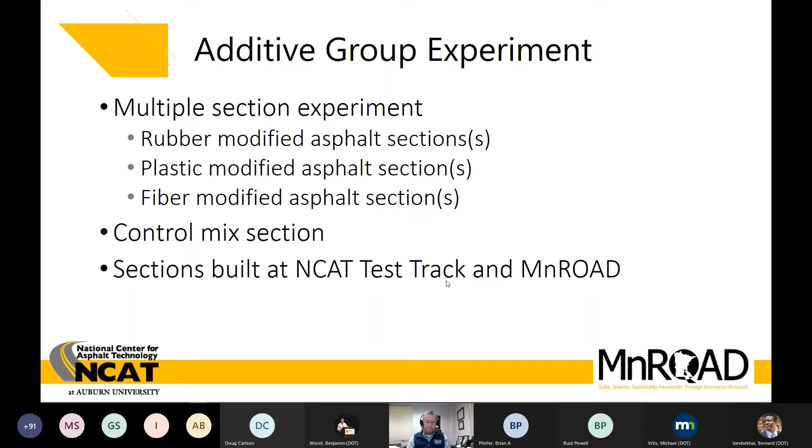Also, just to remind everybody who the sponsors are for this experiment: Alabama DOT, FHWA, New York State DOT, Florida DOT, Mississippi DOT, Tennessee DOT, and Texas DOT. So they're footing the bill for this experiment.

I'm sure there's interest from a lot of stakeholders, both agencies around the country, industry, suppliers, and that kind of thing. The funding this time is a little different. With MnROAD sections, they'll actually be funded more through NRRA, and there's been a lot of discussion about the selection of those experimental sections over the last couple of months. But what we are still doing with this partnership is using the funding through these sponsors to help us do the support work for the construction and evaluation of the mixes that are going to be put down at MnROAD.

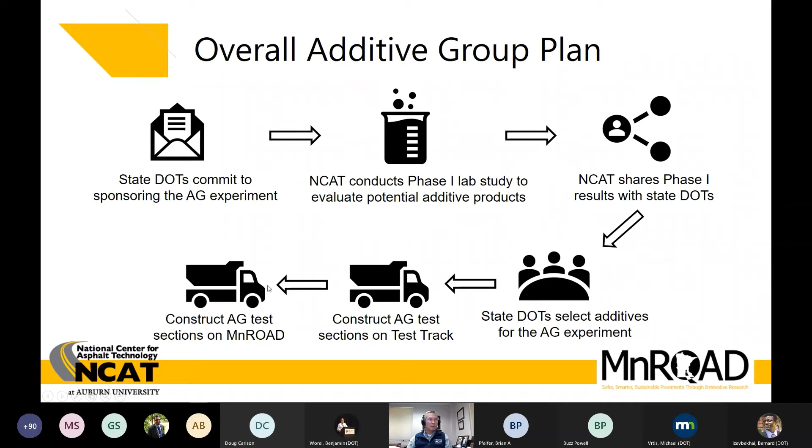And then we've just built the test sections, and we'll do the test sections at MnROAD next year. The phase 1 work included a variety of different recycled tire rubber additives, a variety of different recycled plastic additives, and a couple of different fiber additives.

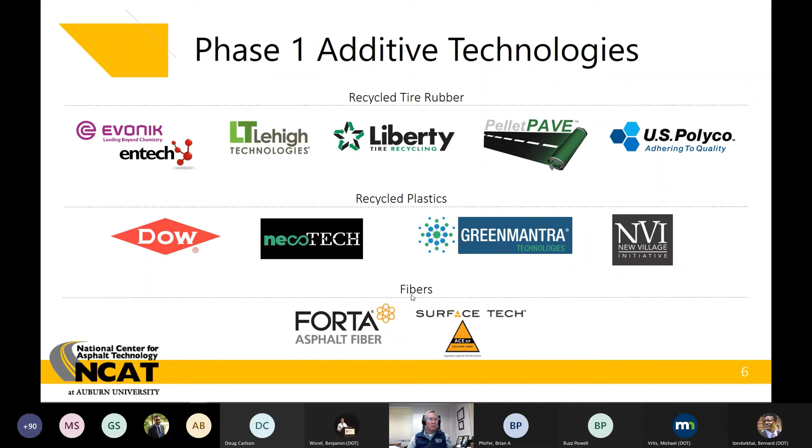Based on the results of the phase 1 work that we shared with those sponsors, we selected these 5 additives: a wet process rubber and a dry process rubber, a wet process plastic and a dry process plastic, and then 1 fiber.

Buzz mentioned also that there are some complementary sections sponsored by BASF and Polyco. They funded completely these 2 sections, S8 and S13. They'll be shared in a lot of ways as a complement to the additive group, because we built these test sections in the same way that we did for the additive group.

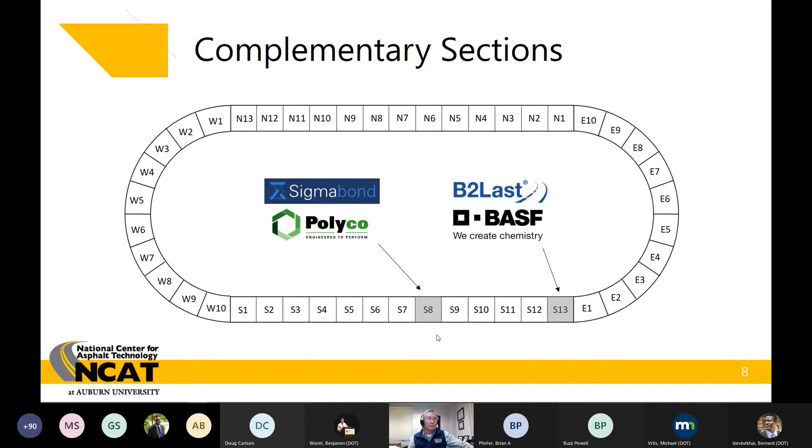Since they're sponsored privately, we will always vet the results of their materials and their construction with those companies before we share them with the public. So I won't be sharing any data from these 2 sections today, because we have to go through that vetting process for making sure they're comfortable with doing that.

So the scope of this project is very comprehensive. We've built the test sections, and we'll evaluate the performance of those test sections with our normal weekly process to evaluate rutting, cracking, smoothness, friction, and all those kinds of things that we normally do on the test track on a regular basis.

As you'll see in some of the slides later in this presentation, all of these sections were instrumented by Dave Timm and his group of graduate students and engineers here at NCAT. With that instrumentation, we're able to really monitor closely the structural response to the loads and environmental changes that occur in those sections, and we'll see how they respond in terms of stress, strain, and deflections.

At the same time, over the next year or so, we'll be doing a lot of laboratory testing on the mixes and materials characterization, both the traditional acceptance-type tests, the BMD-type tests, as well as those tests needed for structural response input into ME-type models like PerRoad, FlexPave, and those kinds of things. So it's a very comprehensive scope to help us evaluate these materials we've built on the track.

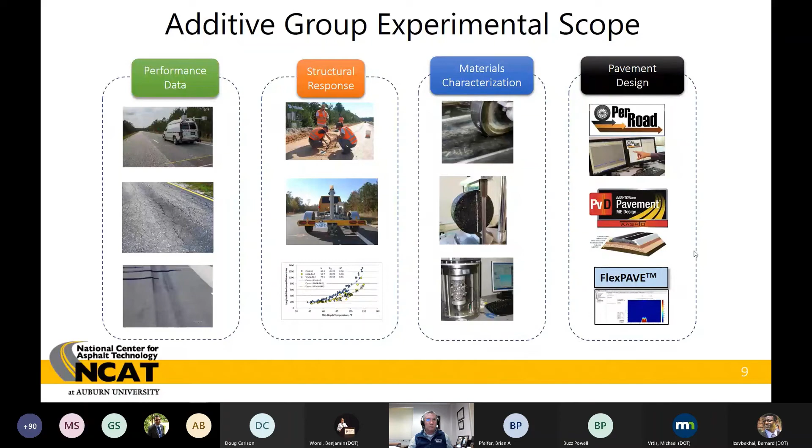We built all of these sections to the same thickness with the same base and subgrade, intentionally at a thickness of about 5.5 inches. That thickness we expect to result in bottom-up fatigue cracking within the cycle. They are all instrumented with strain gauges at the bottom of the asphalt, pressure plates at the bottom of the asphalt, top of the base, and top of the subgrade.

So we'll monitor the performance with these sections. One thing I do want to mention—I don't have a lot of full details yet to share with you—but these were built as one lift, which is a little bit unusual.

The test sections we built for South Carolina DOT last cycle in 2018, we did a section that was roughly about 8 inches thick, and we gained confidence in our ability to do that. We do know that building sections that thick, we're able to get density, but we're not able to achieve the smoothness you would get paving multiple lifts.

So what we've already done is diamond grind all of these sections to an acceptable smoothness. That first round of data has been generated, and Jason Nelson has been sharing some of that preliminary data with me, but I haven't completely discussed it with him before we share it with anybody else.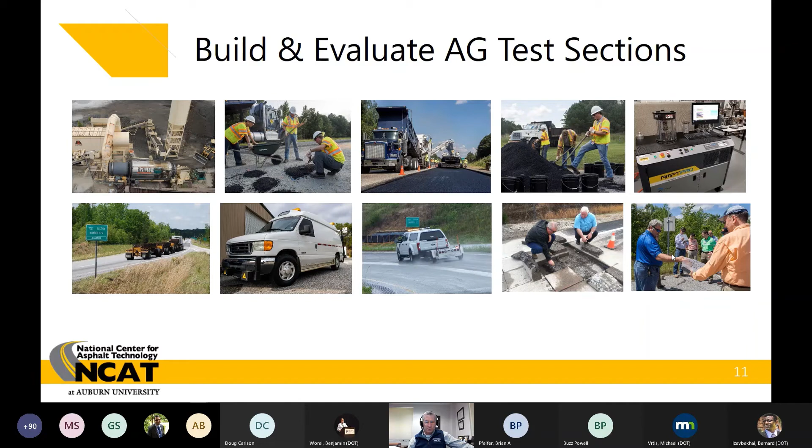So I'm going to show you some of the pictures from test section builds. I won't go through a lot of narrative on these pictures—they kind of speak for themselves about what's going on.

We did have one section in N1 built on the same day as this section that we didn't get pictures of, and that's the Liberty Smart Mix dry GTR product. So Doug, if you're still on and took some pictures of that section being built, I'd appreciate if you could share those with us, because we'd certainly like to have that and be able to share it.

But a lot of these pictures will look the same—it's sort of the same base mix design for all of these sections, and intentionally we built these as comparable sections.

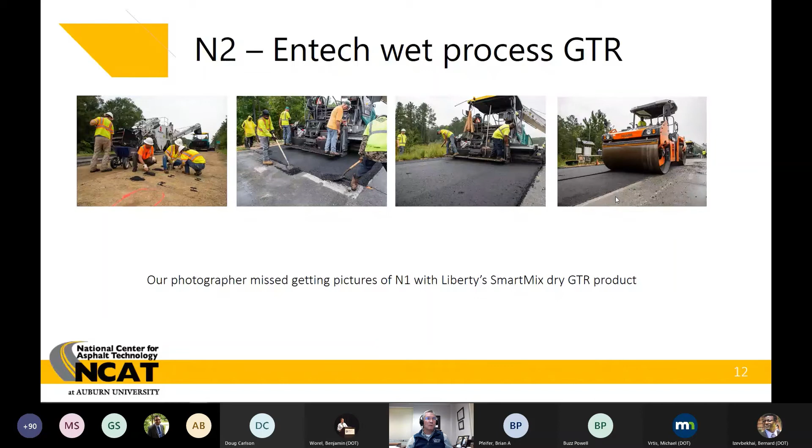So just the normal construction operations and compaction. I'll share with you some of the preliminary data results after I show you all these slides, or these photos.

S6 is a generic dry plastic. It's a low density polyethylene rich material, but not 100% low density polyethylene. It's a waste product, so it's going to have some other types of plastics in it.

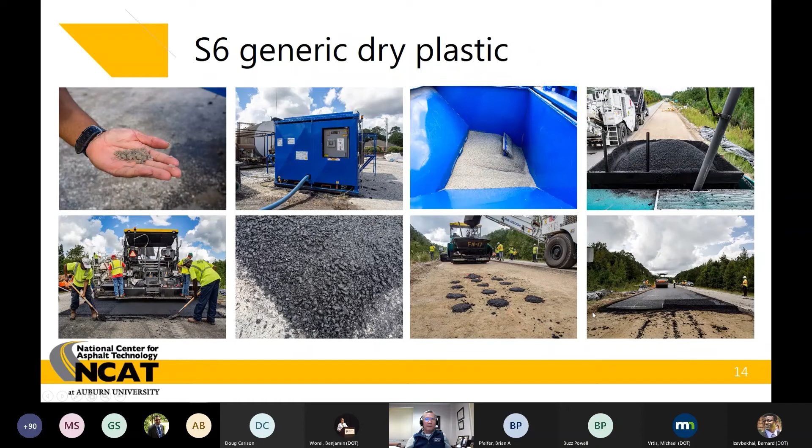And that's what it looks like after it's built. Dow wet plastic, again, just conventional type paving, nothing kind of remarkable about this mix. I didn't get pictures of the binder at the plant, but it would probably look just like any other binder.

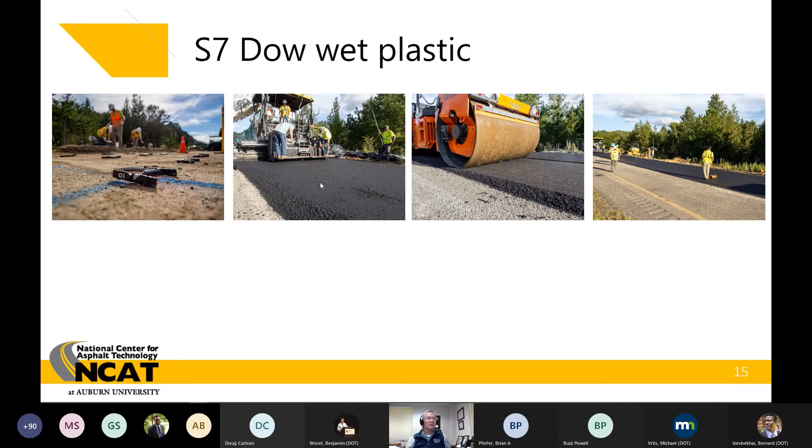So I'll pause here and see if there are any questions about the NCAT additive group sections before we go into the MnROAD sections, planning for the MnROAD sections. Yeah, I don't see anything in the chat box, Randy. If people want to unmute your phones, you can ask Randy a question at this time. Quiet group today. I guess that's okay.

I have a question for you, Randy and Buzz. You mentioned that, especially Buzz made a point to say that using additives should not cause agencies any additional stress. But you also talked a lot about how good the plant was at EAP that y'all use. Are you as confident using additives at any plant across the country? Or can you talk a little bit about some of the precautions that you would first take taking additives to a different plant?

I'll say first and let Buzz jump in there in a second, but all of these additives have been used at a variety of different plants around the country. So I have not heard of any plant limitations. East Alabama's plant does have more equipment than a lot of plants, but the base plant itself, an Astec double barrel plant, is one of the most common plants around the country and probably around the world. So it's not necessarily a real unique plant. You saw that we had fiber feeding systems, or a feeding system, to add these different dry additives, and there's a lot of plants that are very comfortable with doing that around the country.

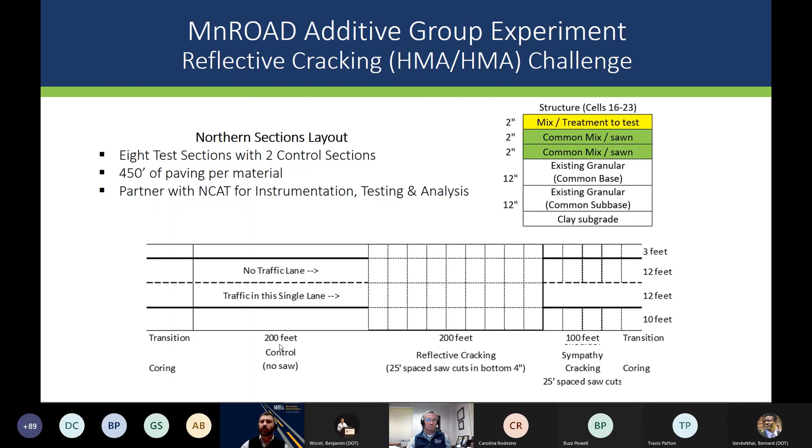So the NCAT sections that Randy was talking about were designed for bottom-up fatigue cracking, and these sections we are monitoring just the surface performance of the lift with respect to reflective cracking.

So I mentioned—you can go ahead and click through the animations, Randy—that we are really trying to better mimic what we're doing out in the field. Part of that, and part of the Caterpillar partnership I discussed in this morning's presentation, is that we're able to—if you keep clicking, Randy, there should be more stuff that pops up—bring in a milling device after we pave, mill the top inch of the surface, and then pave our unique mix on top of a milled surface. What that does for us is better match what we're doing on the network, and it also provides a better bond underneath that unique mix with the existing structure.

One thing to point out on this slide and the last slide: the exact spacing on the last slide, I believe we showed 25-foot spacing for our saw cuts. The exact spacing is something we're going to be working out over the winter as a project TAP, or technical advisory panel. We want sufficient space between the saw cuts so we have movement, but not too much space that we're developing thermal cracks within the pre-prescribed saw cuts. So we want some modeling and careful consideration as far as the number and spacing of the saw cuts that'll be used.

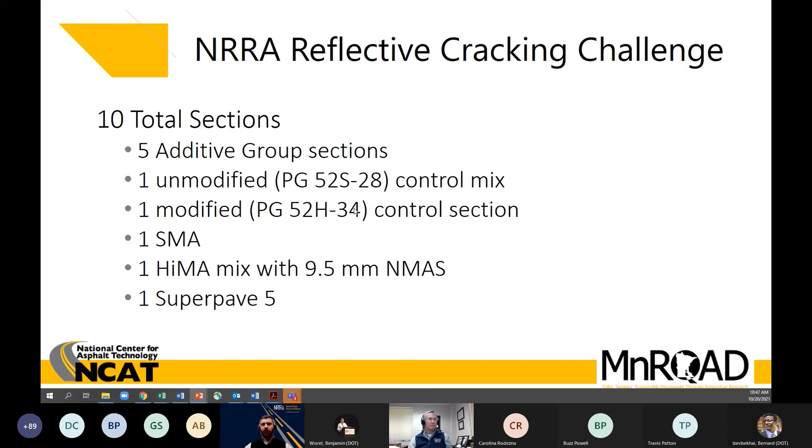Okay, great. For mixed designs, we plan to get raw materials next month and start doing the mixed designs. We'll do the balanced mixed designs with the same additives as in phase 1, and perhaps if other companies want us to do additional work, we'll consider that as well. It'll obviously be with the materials in Minnesota and the binders that they have.

In the NCAT mixed design work, we did not do DCT, obviously, because we don't have too much thermal cracking this far south. But we will add that as our low temperature cracking assessment for mixed design. We may add other cracking tests, and we certainly will add other cracking tests in the overall experimental plan.

And just like I explained with the NCAT sections, we'll share the mixed design data, both the BMD results and some of the modeling work, with agency stakeholders sometime in the spring of next year, and let that group weigh in as to what the 5 additives are for the MnROAD sections.

And then when the sections are being built, NCAT, including Buzz and several others, will be up there, just like in 2016 when we built the cracking group experiment up there, to support construction and sampling of the materials, and bring them back here for additional testing.

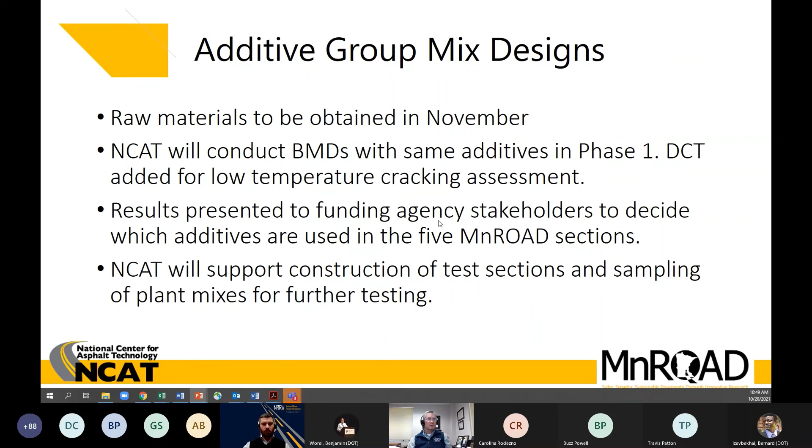So that's the plan for mix designs and construction, and I think that's it for me. Michael, I'll stop sharing here. So if you have other slides, you can share those.

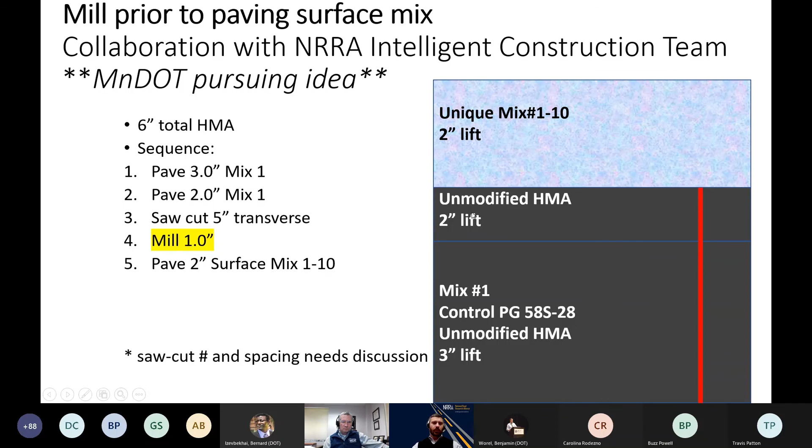Yeah, all right, so I just had a couple of slides to add some additional clarification. I really wanted to talk about what is an NRRA TAP.

So the TAP is the Technical Advisory Panel. As Randy mentioned, we've had a lot of meetings throughout the year, throughout the last several months, and in my opinion they've been very, very productive, more productive than I was even hoping for. It's come to an experiment and collaboration and mixes that I think we all have an interest in, and we're all kind of proud of what we've come together with.

So the whole objective of the TAP, in my mind, is to guide the project, but really it is to maximize the outcomes for everybody. As an agency member, I have a little bit different agenda for what I want to see out of the project than a contractor or someone in industry. But at the same time, our projects should be meeting everyone's agenda, and can.

So really we're involving different opinions throughout the project at different stages. If it ever comes down to something we need to decide, or there's a lot of disagreement on, the agency members do have the overarching authority because they pay a higher dollar amount for membership. But in general we avoid those situations and really try to accommodate everyone, because, as you all know, we advance the industry and advance economics and environmental benefits by moving together and not just as one entity.

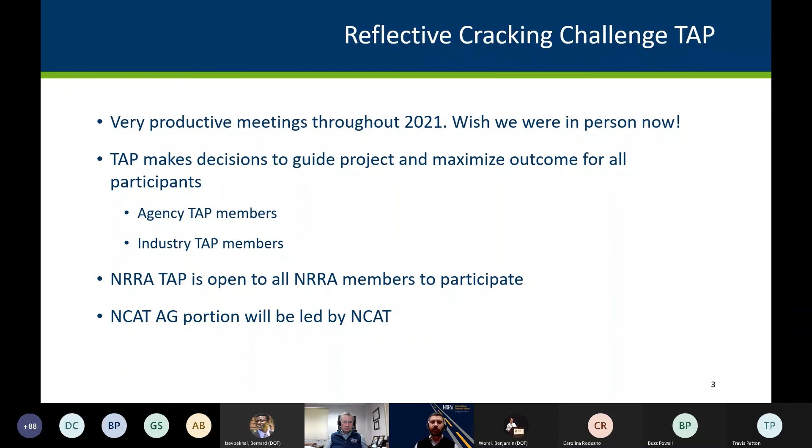And one thing I do want to point out is the NCAT additive portion of the reflective cracking challenge is going to be managed by NCAT, and they will have the final say as far as the products used and the experimental design. Really, we want to keep the integrity of that experiment within the reflective cracking and be sure we're matching and maximizing the benefits of the NCAT MnROAD partnership that we've seen over the last 5 or 6 years.

Really, we have a national effort, as Randy mentioned, with the NCAT and MnROAD partnership. The NRRA's efforts on overlays began in 2017. We had a MnROAD section on our original I-94 concrete alignment that did asphalt overlays over a 50-year-old, pretty severely poor load transfer, bad joint situation at MnROAD. I would encourage everyone to go check that work out if they have not.

So this experiment we're doing now is kind of the next progression to Dr. Eshan Dave's work on the previous NRRA sections, but now we're carrying that effort to bituminous over bituminous, or HMA over HMA. Another unique national contribution: we were approached by Missouri DOT and the Missouri Center for Transportation Innovation, MoCTI, with interest to do a companion spin-off study with this and with the NCAT sections, where they are doing field sections in Missouri, in the Missouri boot heel, looking at asphalt overlays with different additives and different SMA structures.

So another piece that gives us another region and another application. We can use some of the tools that were developed from the University of New Hampshire in the 2017 project and carry those directly to another asphalt over concrete project, providing more links between the work we're doing.

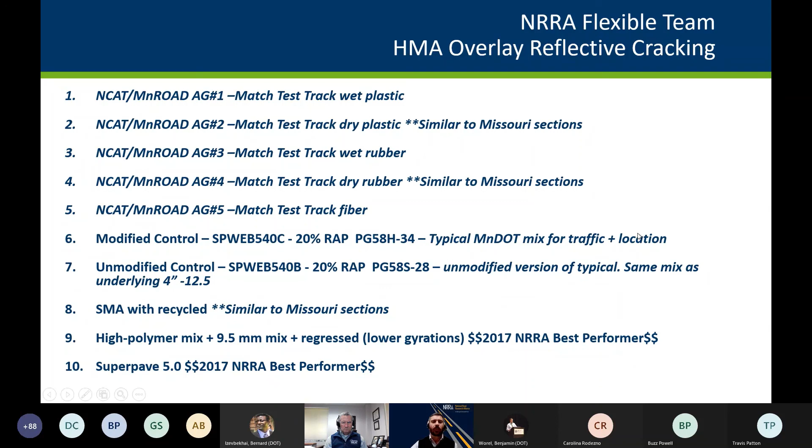One of my favorite parts about the MnROAD NCAT sponsor meeting is the last 5 or 10 minutes. So instead of talking about more instrumentation and future plans, I want to open it up to the group for discussion in the limited time we have.

Yeah, Michael, I wanted to add a couple things. I know Randy showed reflective cracking for the MnROAD test sections. We thought it was better instead of doing 8 test cells to do 10, so we removed 100 feet from each of those. We're only doing 200 feet of non-sawed mix and 200 feet of sawed mix, so we'll have both the low temperature cracking and the reflective cracking as part of it.

The other thing to mention is that the NRRA will be sending out RFPs for this research. That's expected in the next week. We have 8 different projects that we'll be sending RFPs out for, so we'll send a note letting people know proposals are available. I think reflective cracking will be one of the first groups coming out, and that'll be 30 days to respond.

We did have a couple questions on FWD testing and around the thermal crack, the one we're creating with the saw. We'll come up with a process to do that — that's a really good idea. On cold recycling treatments, it kind of came down to real estate and how much space we had, answering a couple things from the chat.